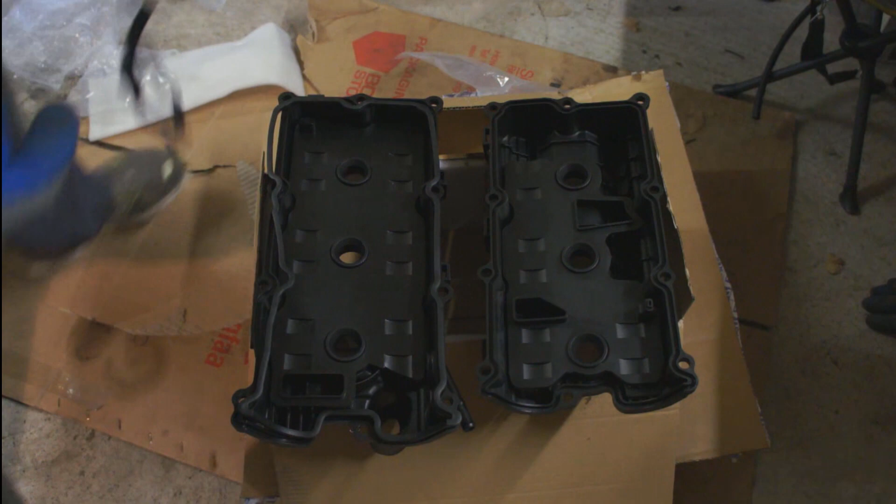These new ones come with new gaskets, so you just have to line it up. They only go on one way, so you'll be able to figure out how they go on. Don't get them confused left to right or right to left.

But there's differences between them. See, this one has a little squiggle here, so you should be able to figure out. They should fit fairly tightly, lay in the groove, and fit enough so that it holds itself in place.

Okay, so I got the gasket all fit in the groove, and it looks like they will hold pretty well in there. So I'll try it first without putting any RTV.

Just a note: you can buy these gaskets without buying the actual valve cover. I would not recommend that. I've seen some people online do this job just to replace the gasket, taking apart half the engine, at least the top part, just to replace this gasket, citing the fact that they don't have any oil leaking in their spark plug wells. But to me, if you're going to go through all the trouble to take the thing apart, it's best to just get the valve covers and do the whole job.

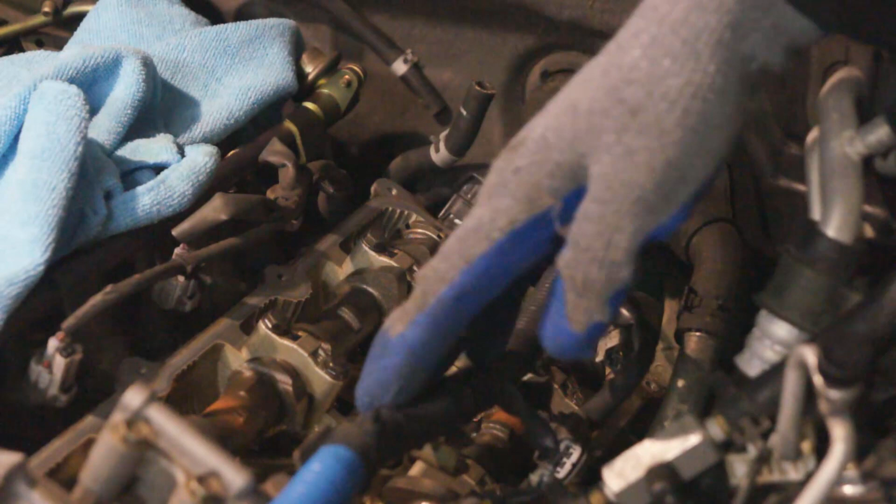Okay, when you're going to put the valve cover on, I'm going to start with the driver's side here and put this valve cover on first.

Now, to make it easier on yourself, get this wiring loom out of the way. Follow the wiring loom all the way back. It should be disconnected from everything other than right back here. There's one more connection, so just push down on the top and you can pop that connection off the back of the engine. Then there's this black one here, and a gray one all the way at the end, and then this black connection.

So this connection at the back, this gray one you can see here - hopefully that's in the frame. Nope, there it is. The gray one here is a normal push connection, so you just press down on this little tab here and pop it out.

This black one is completely different. I don't know why they always make these stupid electrical connections different. This one has got this green tab here, and let me show you how this works, because it's kind of tricky to figure out. What you got to do is push down towards the pins on this green part, and then you can pull it off of the connection. So it's kind of a tricky connector.

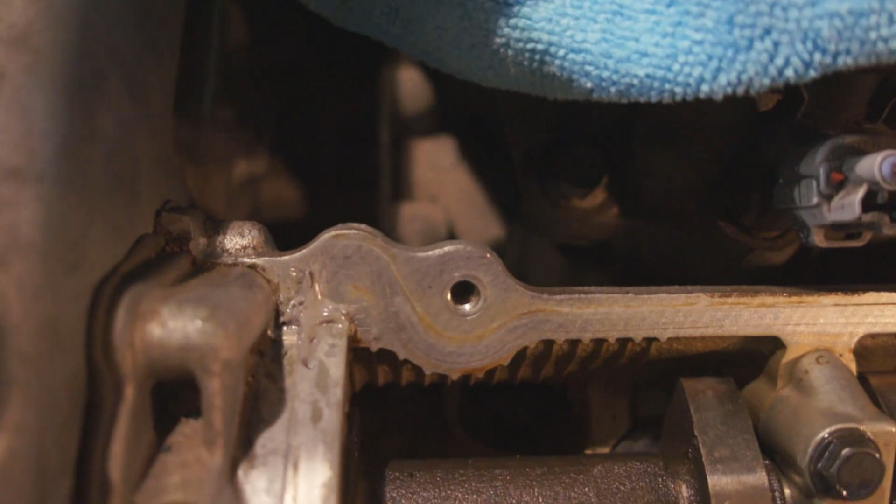Okay, when applying the RTV, you just apply a dab down here in this corner, and then a dab up here in this corner. You can see I kind of made a cross with it, so go lengthwise and then across this way in the actual groove of the corner, and that's the way the manual tells you to do it.

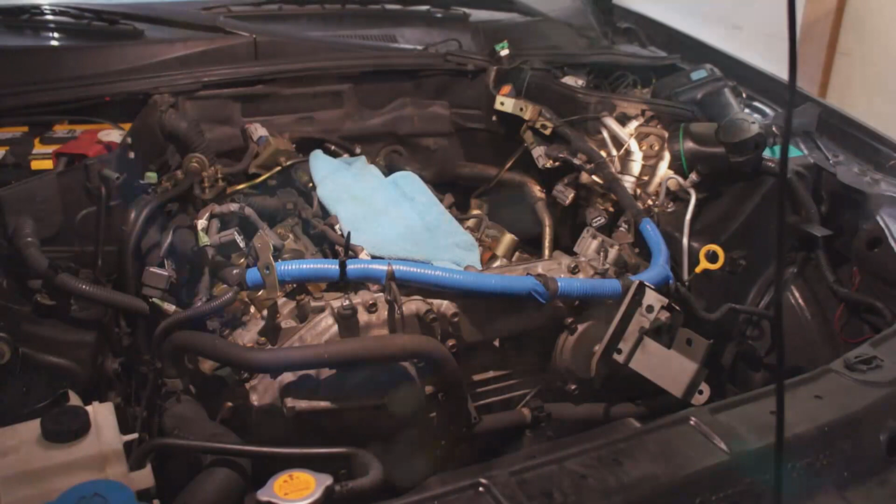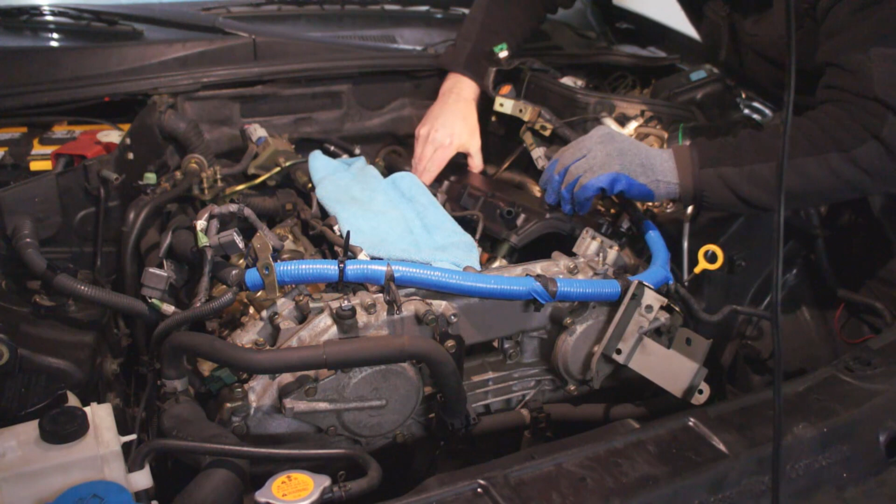Alright, so after you have the RTV in, you can place the actual valve cover in, and you want to seat the back in first. You might have to lift up this tube - there's a water line in the back here that's sort of in the way. You can lift that up and push it back. Make sure you don't catch the wires here for the fuel rail, and then push it down enough that it fits underneath the front here, and then slide it forward.

And then press it down. Place.

Okay, this new seal will fit around these spark plug wells pretty well. Let me show you what that looks like. Right in here, the rubber will fit pretty tightly around the metal inside the spark plug well, so you'll feel it kind of pop into place.

And you want to make sure that you got the gasket in over here. See, there's the actual cover and then the gasket, and you want to look around the whole outside and make sure the gasket didn't get wrinkled or pushed out of place when you were installing it. So I'm going to go around the whole edge and check the gasket to make sure it's sitting flat on the engine, in between the engine and the valve cover.

Okay, so I have my inspection camera out, so I can get in here and make sure that this gasket is properly in place, because there's no way to get underneath behind here to figure out if it's properly installed. So I can go in here with this inspection camera and see perfectly well if the gasket is in place. So it's in the corner there, it's touching the RTV.

And then just make sure as I go down the line I can see the gasket, sandwiched in between the two parts. That's good. Alright, so it looks like the gasket is fully in place, and now I will put the bolts back in.

And I'll torque these down. You need to use your magnet to get these into place, and then use your finger to pop them off.

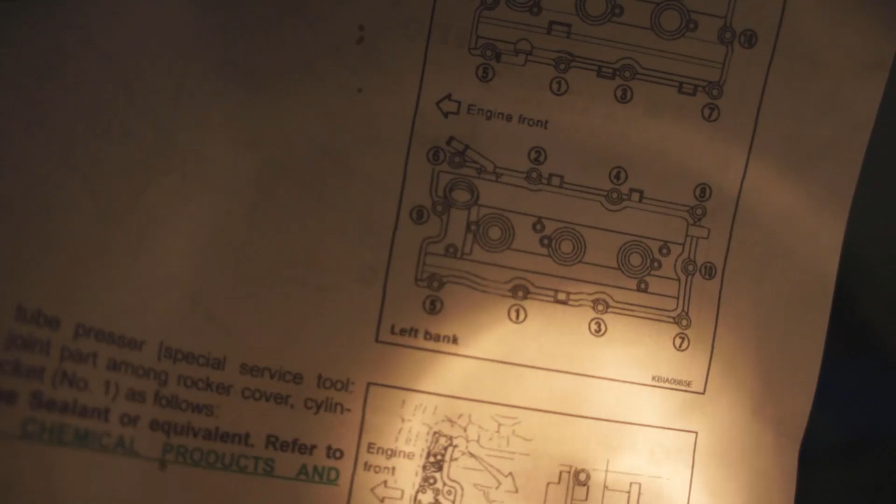Alright, now is the tightening procedure, as far as how they want you to tighten these down. So on this side, number 1 is down here. Let me see if I can hold this. Number 1, number 2, number 3, 4, 5, 6, 7, 8, and then 9 in the front, 10 in the back.

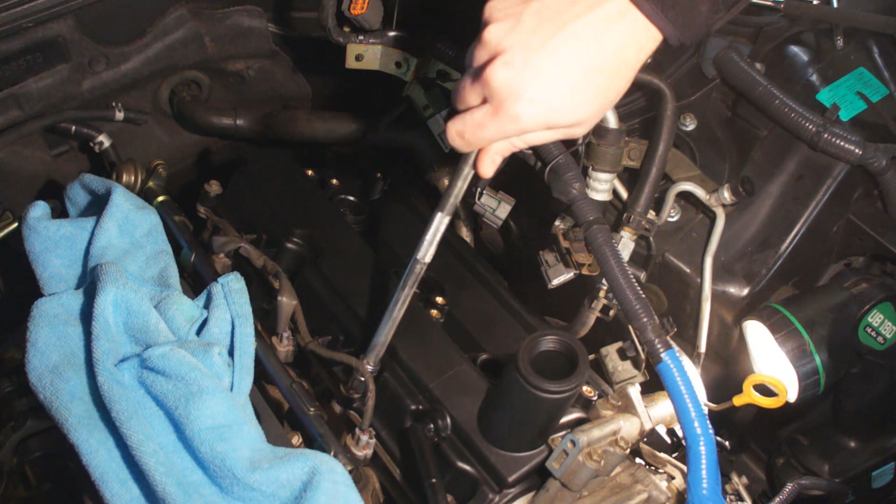Okay, like I said, tighten down this one here. So 1, 2, 3 back here, 4, 5 up here in the front, 6 across, 7 down here in the back, 8, and then 9 up front, very front, and then 10 in the way back.

So right now I'm just going to go ahead and thread them on, and then I'm going to torque them down in that order. Make sure you don't cross thread.

You might have to use a smaller 1/4 inch drive on some of these. Like this one in the front is kind of a tight fit, so use a 1/4 inch drive and it gets in there.

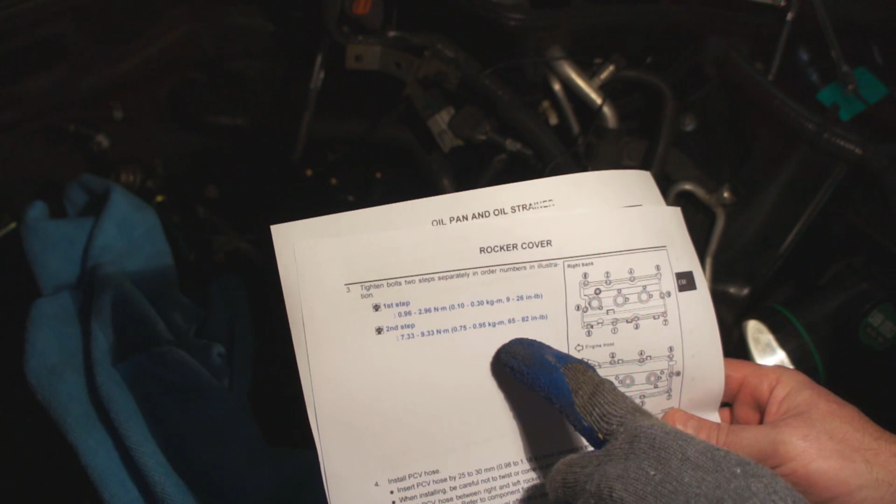Okay, so it's a 2-step torque spec. Up here it says the first step is to tighten it down to 9 to 26 inch-pounds, and then the second step is you go through the same sequence and torque it down to 65 to 82 inch-pounds. This is inch-pounds, not feet-pounds. Make sure you don't crack the valve cover because it's just plastic, remember.

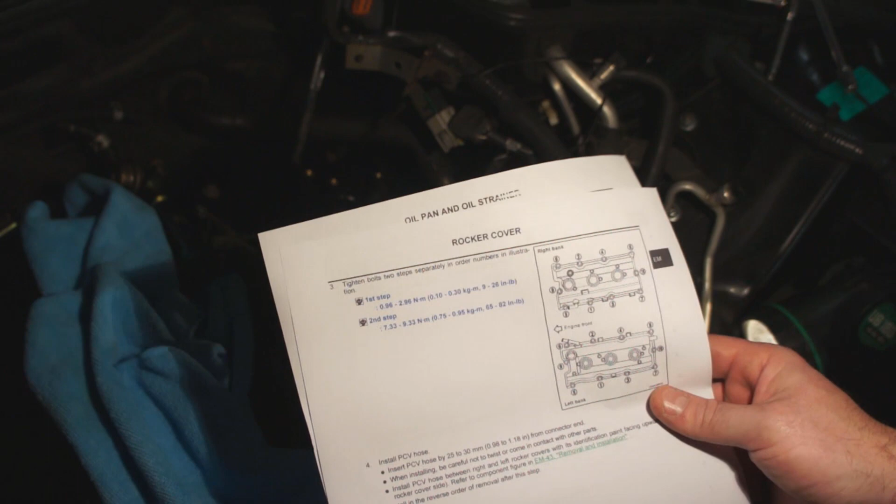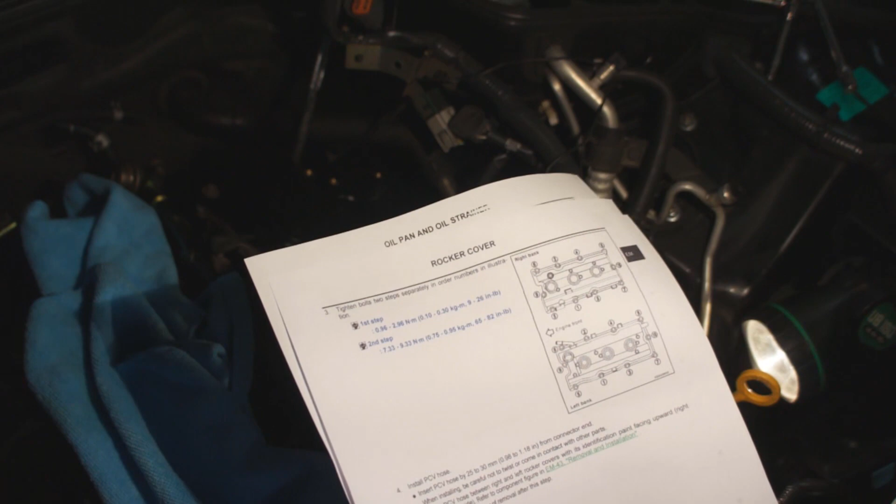So again, the pattern that I just showed you, and then do it one time at 9 to 26 inch-pounds, and then do it the second time at 65 to 82 inch-pounds.

Okay, now over on the passenger side, I've gone ahead and wired the wiring loom here to keep it away from where I'm going to be installing the valve cover. I've also taken this fuel line here, the fuel pressure regulator, which goes back to the fuel rail. You don't want to bend this wire back here, but you can move it a few millimeters to get it out of the way.

So I wired that up, and now the same process will apply to this one. I'm gonna put the rear of the valve cover in, and then level it out, and then push it forward, and then seat it into place here in the front.

And again, I'm going to put down some RTV in this groove here and the groove on the bottom half here, just like I did on the other side. Okay, so I got the RTV in there, and hopefully this one will go in fairly easy like the other one did.

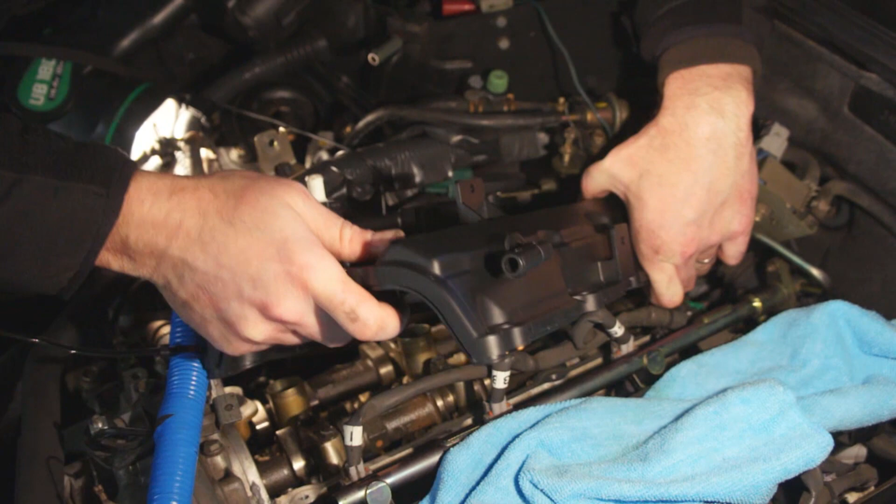Just making sure the gasket's staying in. Okay, oh there we go.

Okay, just gonna put my hand underneath to feel the gasket before I go ahead and lay it down, just because I had to do a lot of wrangling to get it in there. Let me feel this side. Okay, feels like the gasket stayed in place.

I just need to move it aft enough to get under here, and move it forward. When you move it forward, make sure it's up high enough to not squeegee the RTV out of the way. And then move it forward and press it down onto the RTV.

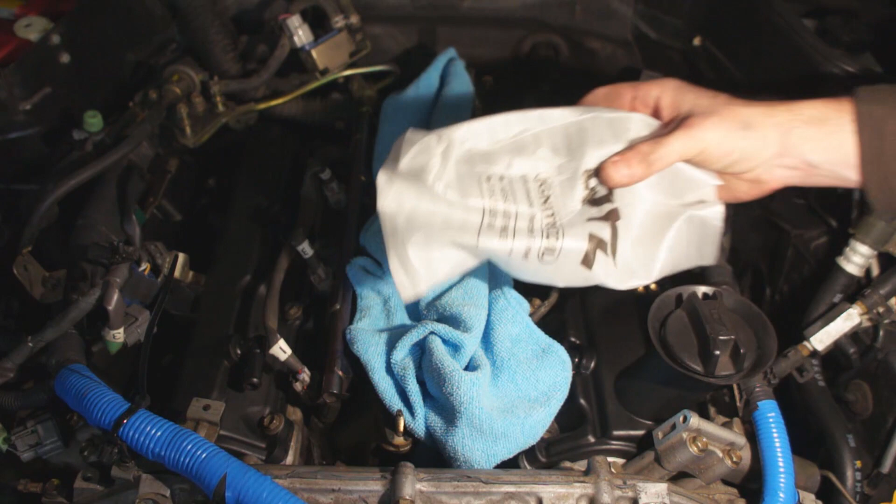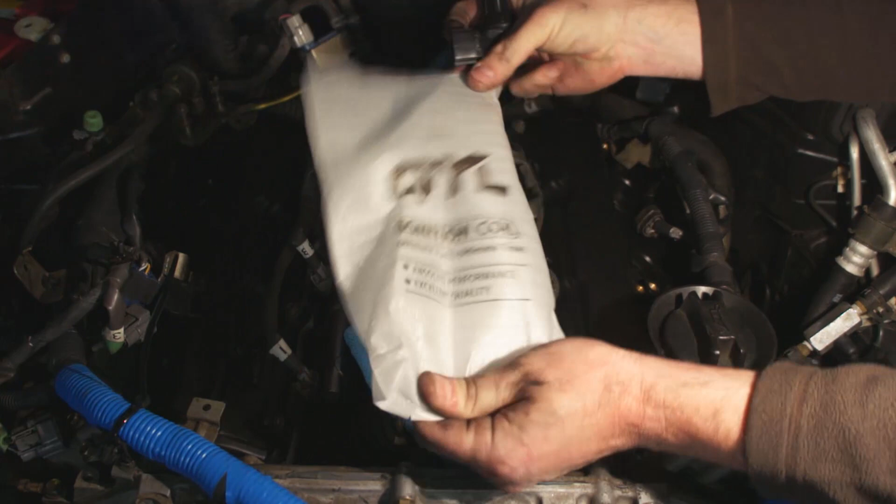Okay, another job I decided to do while I'm in here is replace the coils. So here's an old coil, and here's a new one. These are QYL ignition coils. Bought them off of Amazon for a pretty decent price, and they were rated pretty well by the people who reviewed them.

So you can see here, same, pretty much exact thing down to the rubber. It's all the same. It's got the same moldings on it and everything. So I'll replace the coils with these.

And put them into place here, and make sure that the wiring harness connection is pointing the correct way. The coil can go either way, but the wiring harness won't fit, and also the bolt hole needs to line up with the bolt hole on the top of the valve cover. So I'll show you a close-up of that as I install one of these.

Okay, so the spark plugs are all tightened down, and so this coil goes, you can see the mounting hole is over here. It might be behind this, so I'll move that out of the way. So there's the mounting hole. You just kind of seat these into place, push it all the way down.

So you grab your bolts for the coils, and you just bolt it into place. It's a 10mm.

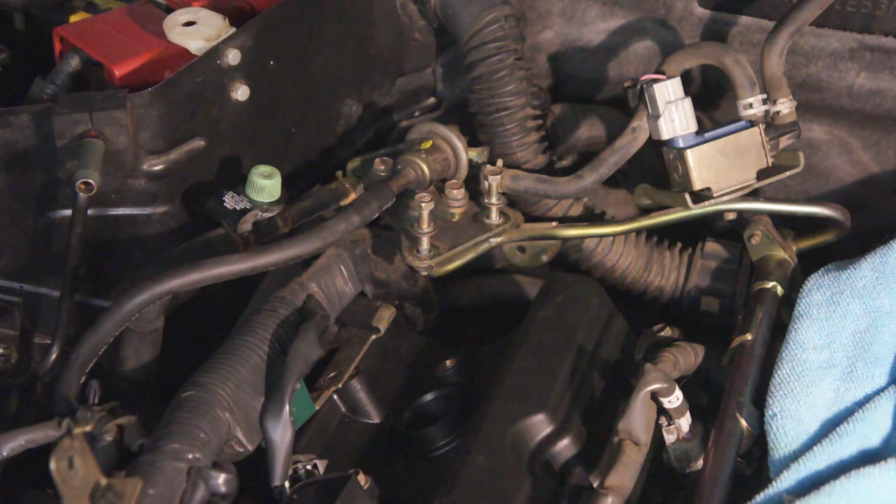Okay, over on the passenger side, before you put this last coil pack in place, you'll put the bolt in here. There's a bolt that goes and holds down the wiring harness at the back here, so put that in first.

But now that I got this back one tightened down, I can put all these coil packs in on the passenger side and tighten those down.

Okay, above the number 2 coil pack, actually, shoot, number 3 coil pack is this bracket that has this blue electrical connection on it. So there's a bolt hole here on the valve cover. You have to bolt that in, and then there's this clip that connects right here that holds the wiring harness to the valve cover. So you can clip that in place, and I can put that bolt in.

Once you get that in place, you can clip in this, there's a black plug here that connects to this blue, this main wiring harness. So you can slide that into place and clip it in. There we go.

Okay, over on the driver's side, there's a couple more bolts to hold down the wiring harness here. So you got the harness here, and there's this metal here. So there's a bolt here, and same thing over here, wiring harness, and this metal bracket, and the bolt there. So those two you can attach and tighten those down.

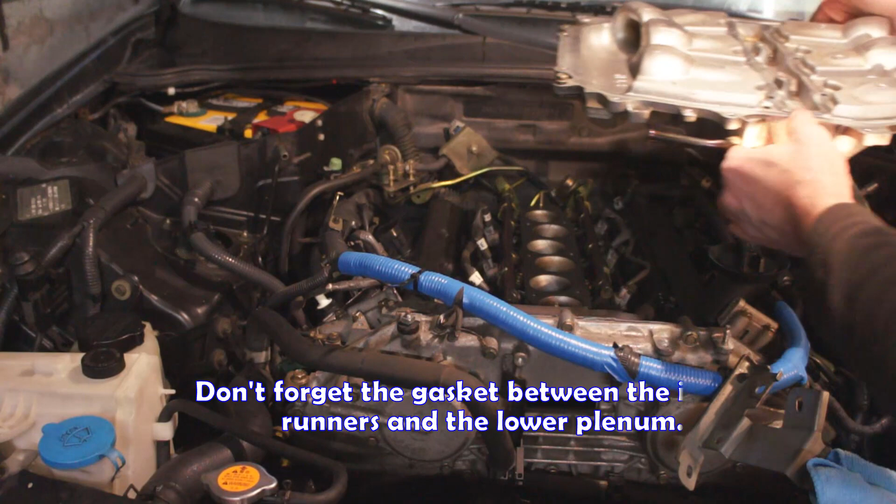So you have this breather hose that goes in the front, so make sure that's in the front, and you just place it on here, these two guide bolts, and then make sure it slides down evenly, and then you can move that fuel pressure regulator out of the way. There we go. Make sure it just seats down on there nice and straight.

Okay, there's a 10 millimeter nut on the front and there's one on the back. I'll just finger tighten those down for now. And then get my Plenum Spacer.

There's a gasket that goes in here, but I have this Motordyne Plenum Spacer, which again prevents heat from radiating up to the top part of the plenum from the lower. And so that goes on next.

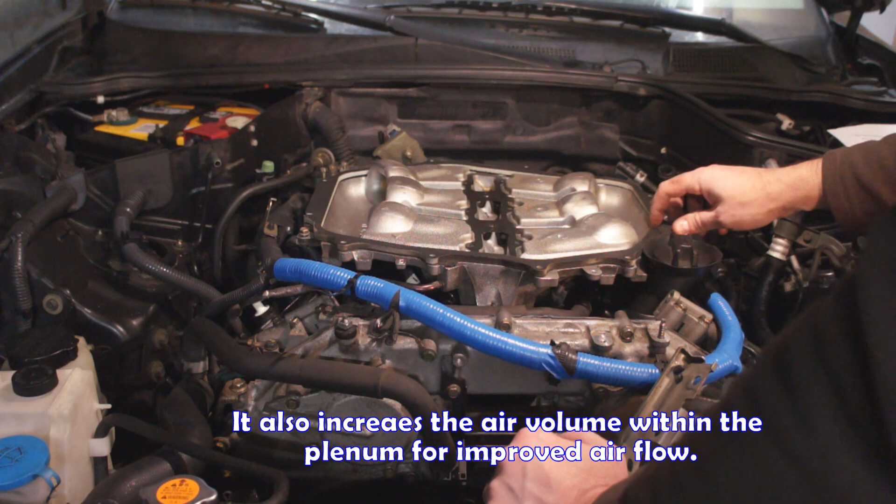And then this cover, there's an arrow here that points to the front, so you know which way you go front. And on the Motordyne Spacer there's also some arrows here that point to the front. And so that goes on in the center.

And then there's these long bolts that go down through.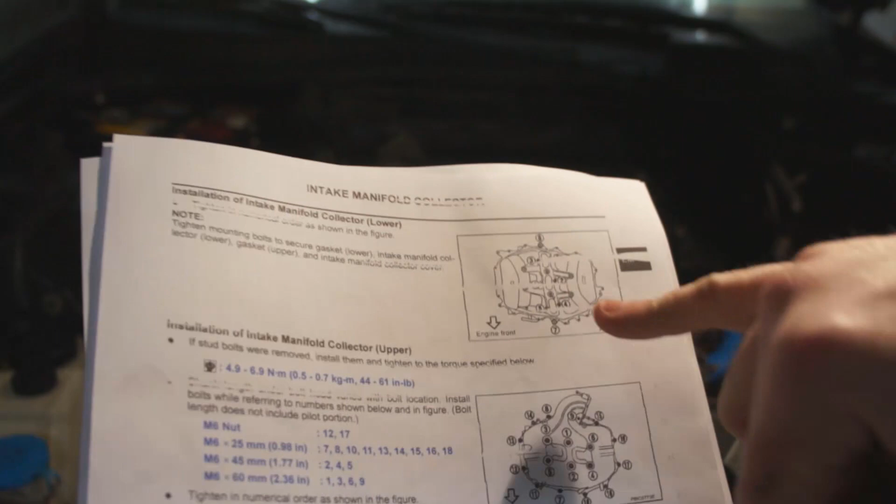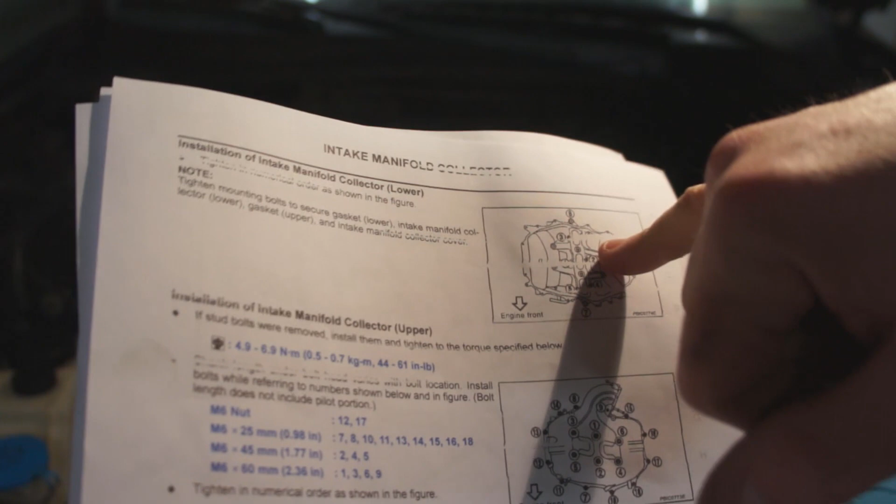Alright, again here, in the shop manual it has this diagram. You might not be able to see it in the picture, but basically there's 6 of them, so the middle 2 get tightened down first. So number 1, number 2, number 3, number 4 at the back, number 5, number 6 at the front, and then the very front nut 7, and then the back nut 8.

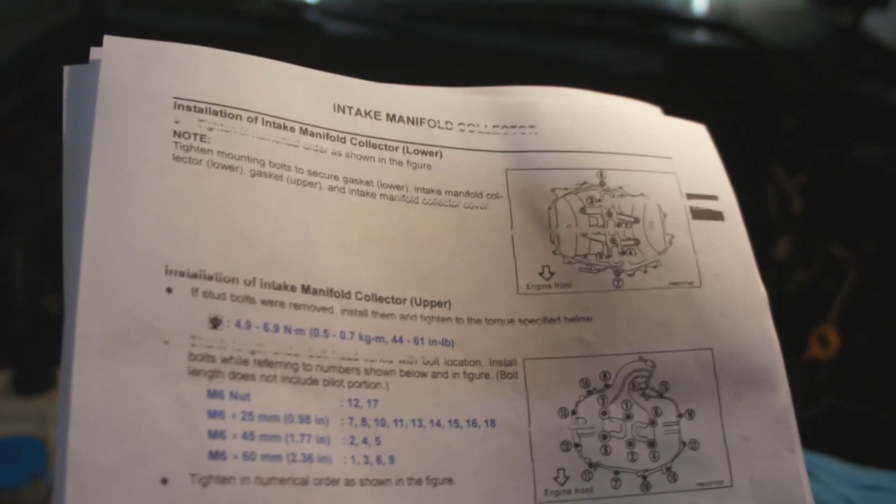Okay, once the plenum is attached, or the lower plenum, you can attach this bracket right here, which holds the wiring harness in place. Okay, now we're getting ready to put on the upper plenum. So remember here what connections you have. So at the back, this is obviously the bottom.

You've got 2 here for water lines, and then there's an electrical connection here, and at the back there's an air line. Those ones are difficult to get to, so make sure you're thinking about those as you're installing this.

Under here you can see where that hose goes on the throttle body, and here's the clip. It helps if the tabs of the clip are pointed towards you over here on the driver's side of the vehicle, then you can grab them and move it up.

Now you've got this hose right here that connects inside. For my application only, this won't be the same for all applications, but there are these spacers that go with this Motordyne plenum, so you have to lift up and put those right below the 6 bolts that go through.

These bolts go back in, but be careful because there are 2 sizes here for these 6 in the middle. The long ones go to the back because this slopes down, and it's higher in the back than it is in the front.

So you put those on, and I'll hand thread all of the bolts here and around the outside. Make sure you get them in the right spots because there are longer ones. For example, the one right here next to the throttle body is really long. They all need to go back to where they came from, so hopefully you labeled them somehow so that you can get them all back in the right spot.

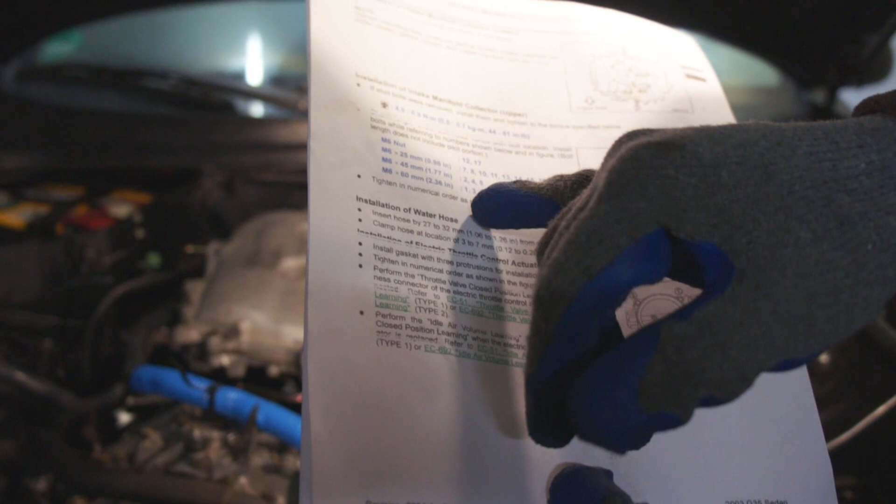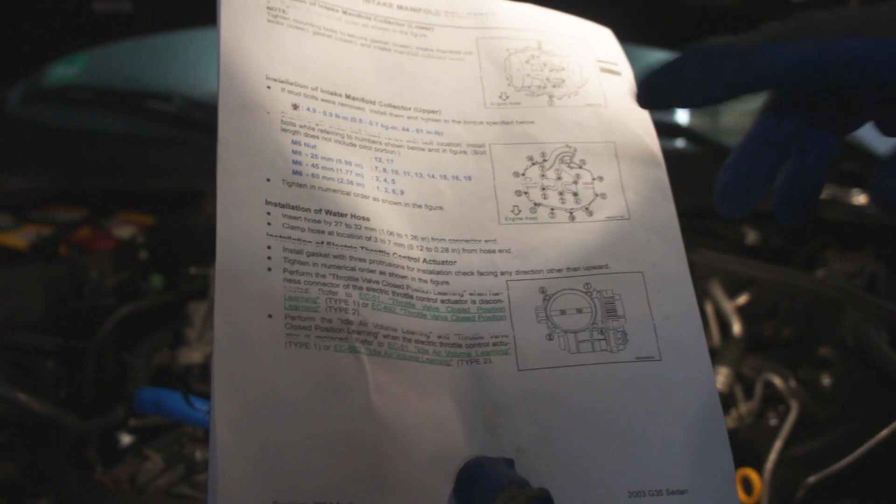Alright, here are the specs for how to tighten down the top plenum. There's an order to it, number 1, 3, 6, and so on. I'll post this in the description so you can see what the order is. But follow the order, then tighten down to 44 to 61 inch-pounds, which is the spec.

Once you get all these tightened down in the right order and to the right torque spec, you can start connecting all the little hoses and everything that go around the outside. So there's a hose here, there's the wiring connection for the throttle body, so we put that into place. On the back side of the throttle body, there's a vacuum line here that you push into place.

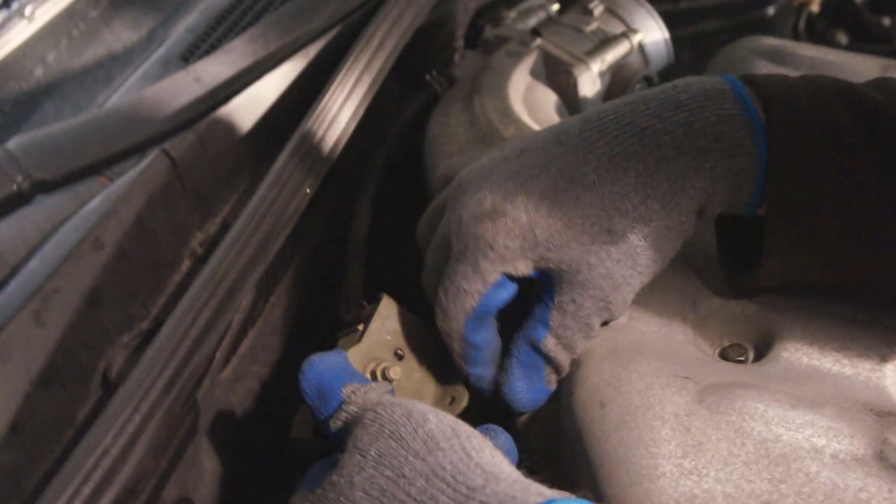And then at the back here there's this clamp that goes on with one bolt to the upper plenum.

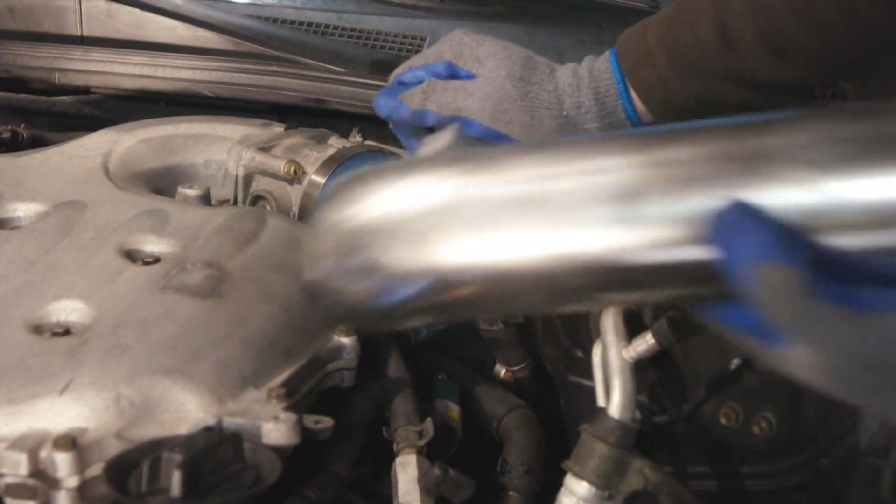Okay, so now the only thing left is to put the intake back together. So you've got this one hose right here that you'll have to get on.

You've got to put the front of the filter box back in place, and in order to do that, you have to take the MAF off. It's easier to fit it in there with the MAF off.

So you fit the box all together, then slide it onto the pipe here for the intake. Then connect the MAF wire connection again.

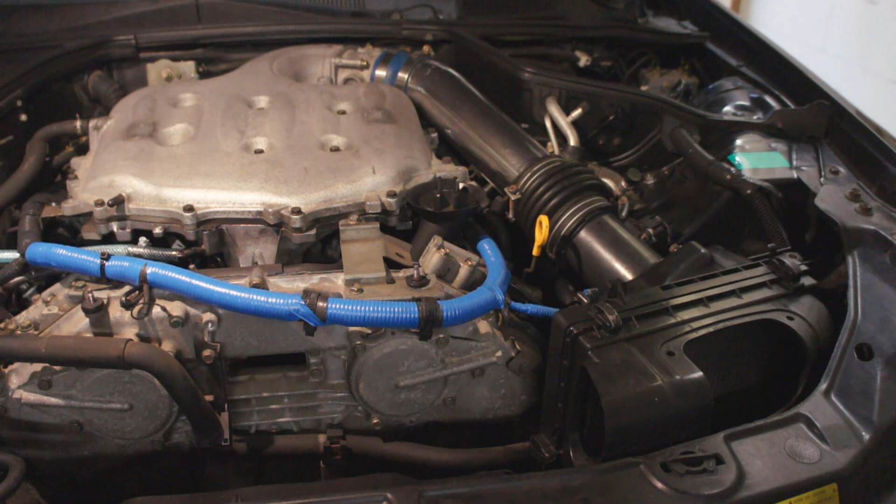This is all just blue electrical tape, because the tape that was on there was really kind of flaking off and not doing so well. It had been in there and dried up and started to become brittle, so I took that off and just replaced it with this electrical tape that I had.

As far as other things to make sure you connect, there's two bolts here, and the clips right here that connect to the wiring harness, so connect those all together. There's a negative terminal here that connects right onto the front of this bolt, which goes into the wiring harness here.

Over on the other side, I think I already talked about this bracket up here that connects to the wiring harness. The PCV valve tube - if you're not doing the catch can mod like I'm doing here, just make sure you connect that tube back in from the PCV valve to the inlet here of the plenum. I'll explain the oil catch can in another video.

Let's see, what else? After that, there's the front piece that connects on here for the intake. There's another piece that connects on with some plastic snap rivets here for the front of the airbox. And then there's putting the plastic shroud on top of the engine, if you still have one.